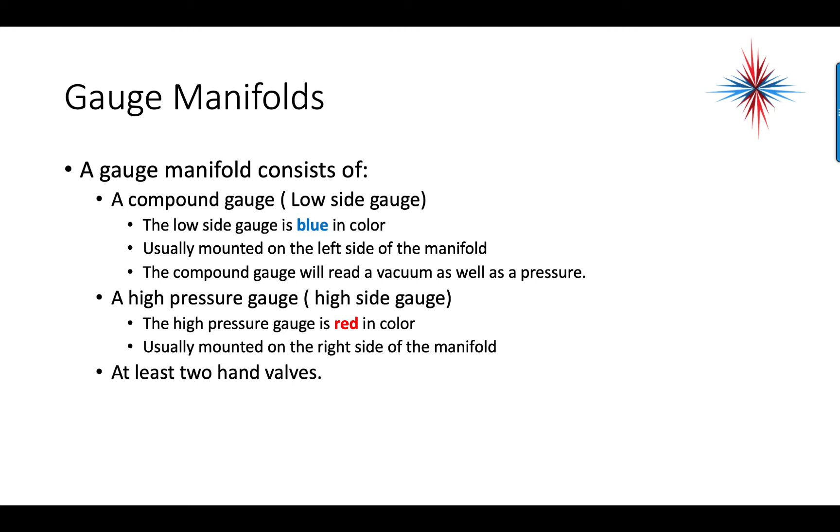And there's at least two hand valves, usually on the left and right side, or on the left and right front side of the manifold.

A gauge manifold allows a service technician to check the operating pressures of both the low side and the high side at the same time. The operating pressures of the system are read in pounds per square inch.

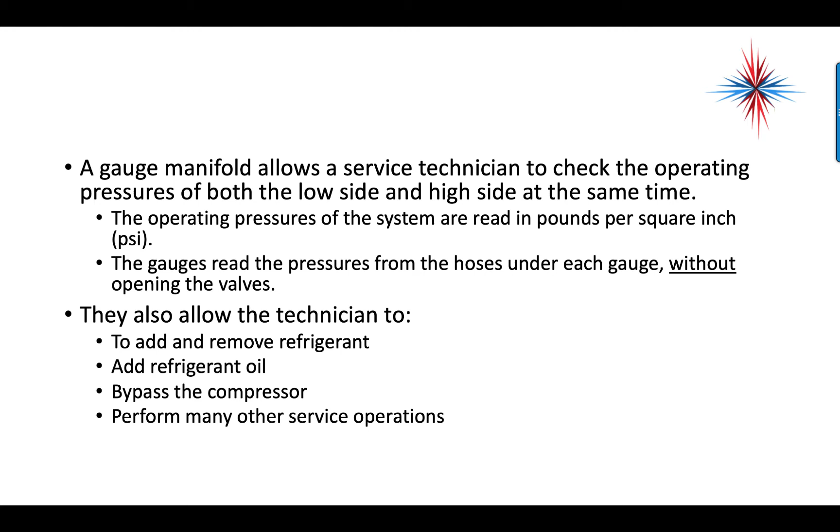The gauges read the pressure from the hose under each gauge without opening the valve. In other words, make sure your valves are closed before you connect the gauges. The gauges will also allow the technician to add and remove refrigerant, add refrigerant oil, bypass the compressor, and perform many other service operations.

So this is a picture of a gauge manifold. You have your two gauges. Low is the blue, high is the red. You have your high pressure gauge, compound gauge, low side valve, high side valve.

Again, the valves are closed to give the path to the gauge by itself. You have the connections, you have a sight glass sometimes, and then you have additional ports on the left and right side.

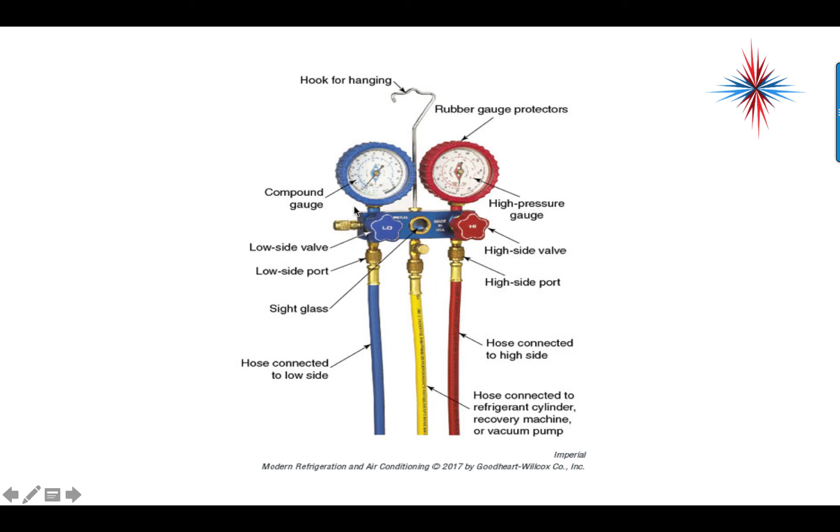Low side pressure gauge reads the pressure through the whole low side of the system, from the metering device to the compressor. High pressure gauges read the pressures on the high side of the system, from the compressor to the metering device.

Under normal circumstances, you will see the same pressures all the way through the low and the high side of the system. In other words, it doesn't really matter where on the high side you're connected, doesn't really matter where on the low side you're connected. You might see a PSI difference if you have a large evaporator coil, long line set, or a very large condenser.

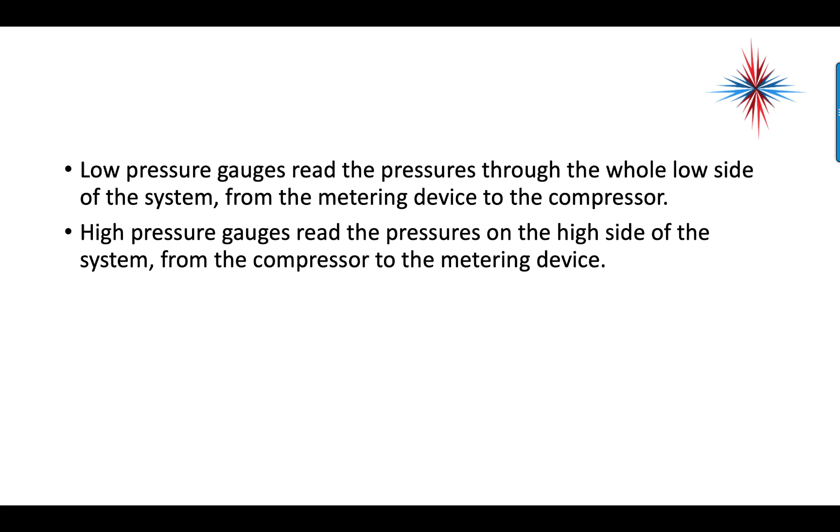But it's not enough to make a difference under normal circumstances. You can always say there's an oddball situation, but 99% of the time you should see relatively close to the same pressures.

Manufacturers color code the low and high side of the gauges. Blue hose to the low side of the system, red hose to the high side of the system.

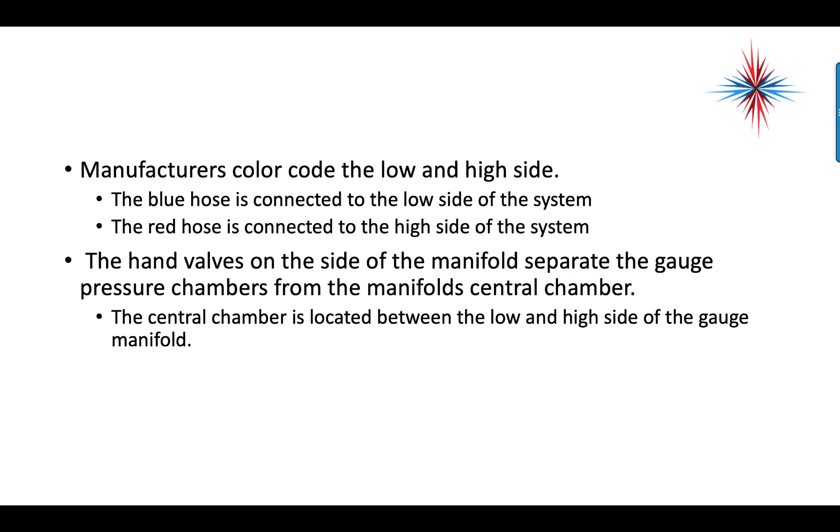The hand valves on the side of the manifold separate the gauge pressure chamber from the manifold center chamber. The center chamber is located between the low and the high side of the gauge manifold.

A yellow hose connected to the center port is connected to a refrigerant cylinder, a vacuum pump, or a recovery machine. Some gauge manifolds have a sight glass that can be used to view the flow of liquid through the center chamber. It can also be used for charging or recovering liquid refrigerant.

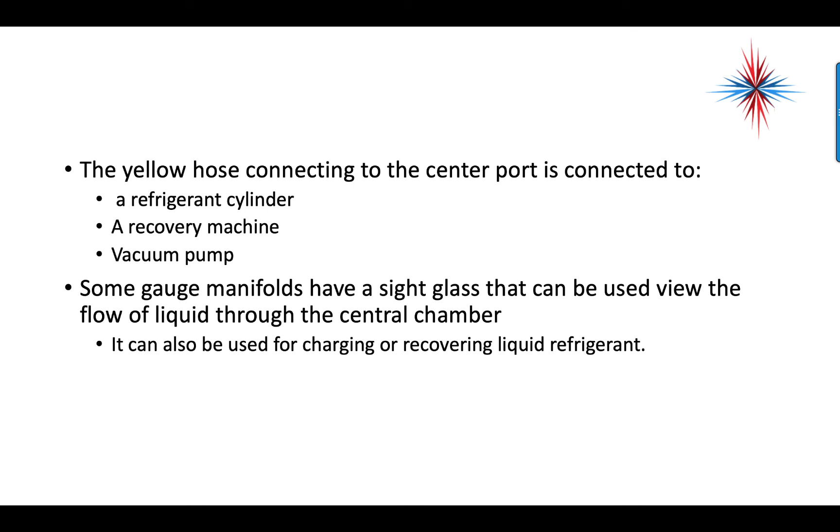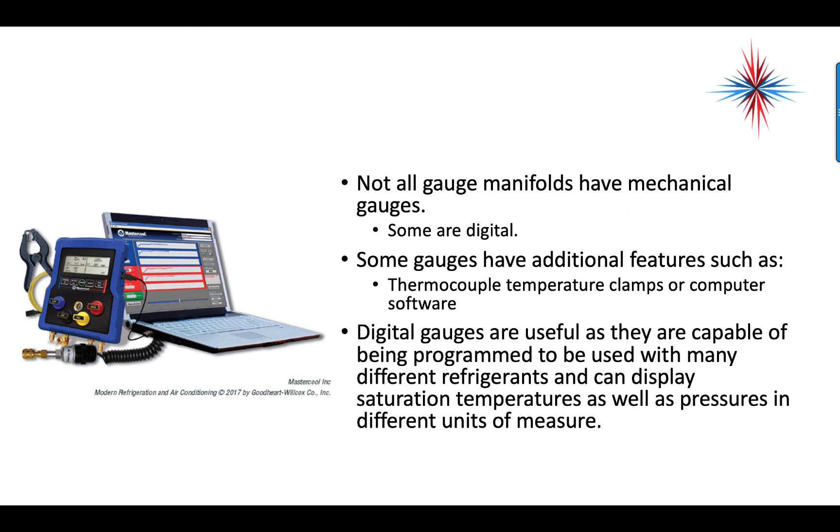Not all gauge manifolds have mechanical gauges. Some are digital. Some gauges have additional features such as thermocouple temperature clamps or computer software. Digital gauges are useful because they're capable of being programmed to use with many different refrigerants and can display saturation temperatures as well as pressures in different units of measurement.

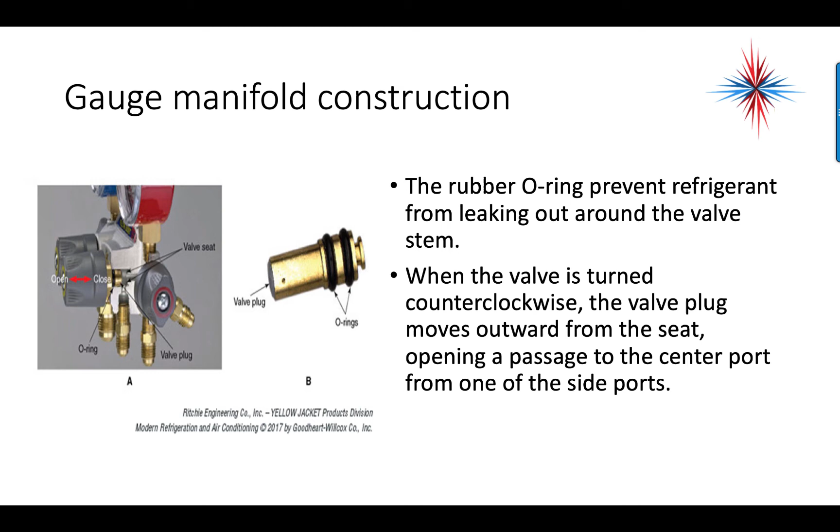The rubber O-ring prevents refrigerant from leaking out around the valve stem. When the valve is turned counterclockwise, the valve plug moves outward from the seat, opening a passage to the center port from one of the side ports.

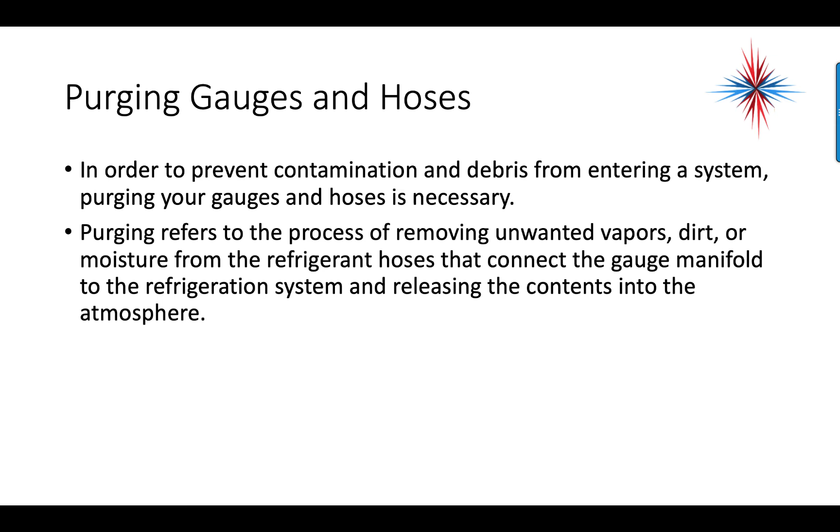In order to prevent contamination and debris from entering a system, purging your gauges and hoses is necessary. Purging refers to the process of removing unwanted vapors, dirt, or moisture from the refrigerant hoses that connect the gauge manifold to the refrigeration system, releasing the contents into the atmosphere.

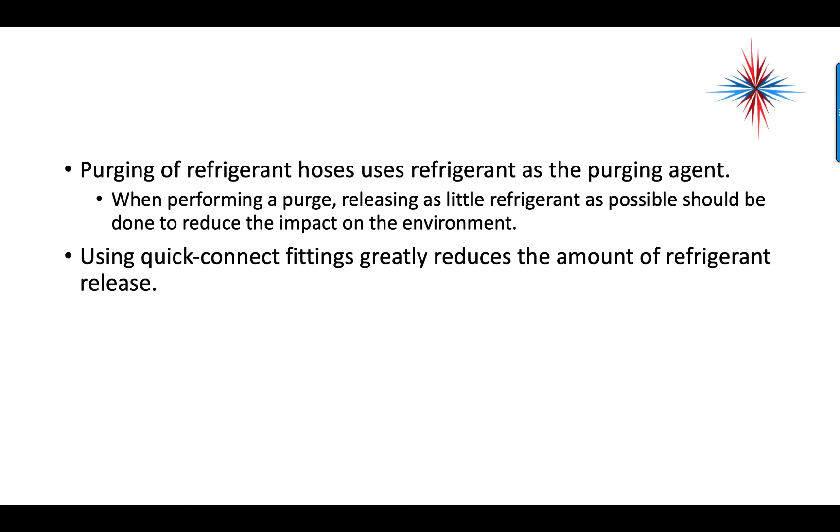Purging of refrigerant hoses uses refrigerant as the purging agent. When purging, release as little refrigerant as possible to reduce the impact on the environment. Using quick connect fittings greatly reduces the amount of refrigerant released.

Quick connect fittings are spring-loaded brass fittings which seal off the refrigerant inside each hose. Older gauge sets can be retrofitted with quick connect fittings. You can actually buy these, even on Amazon if you have to.

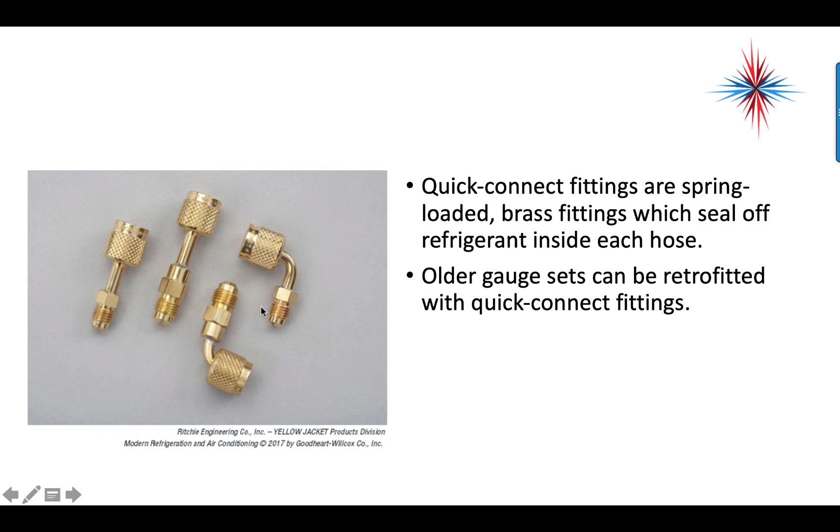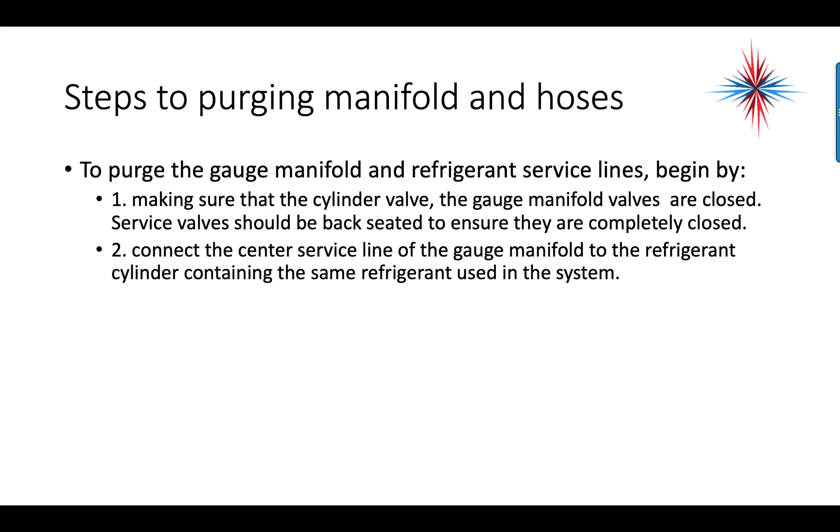To purge the gauge manifold and refrigerant service lines, begin by making sure that the cylinder valve and gauge manifold valves are closed. Service valves should be back-seated to ensure they're completely closed. Connect the center line of the gauge manifold to the refrigerant cylinder containing the same refrigerant as used in the system. Remove the caps from the system service ports and loosely connect the gauge manifold's low and high side lines for purging.

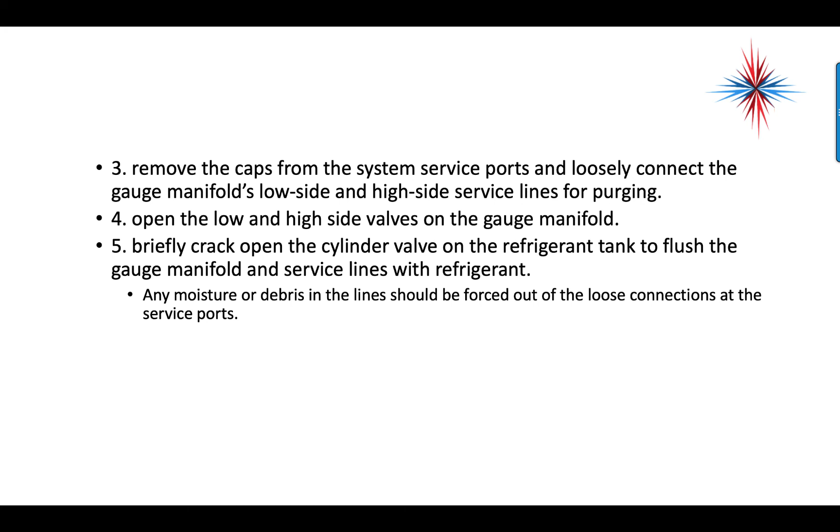Open the low and high side valves on the gauge manifold. Briefly crack open the cylinder valve on the refrigerant tank to flush the gauge manifold and service lines with refrigerant. Any moisture or debris in the line should be forced out of the loose connection at the service port. Close the cylinder valve, tighten the service line fittings at the ports. The service valves can now be opened without fear of contaminating the system.

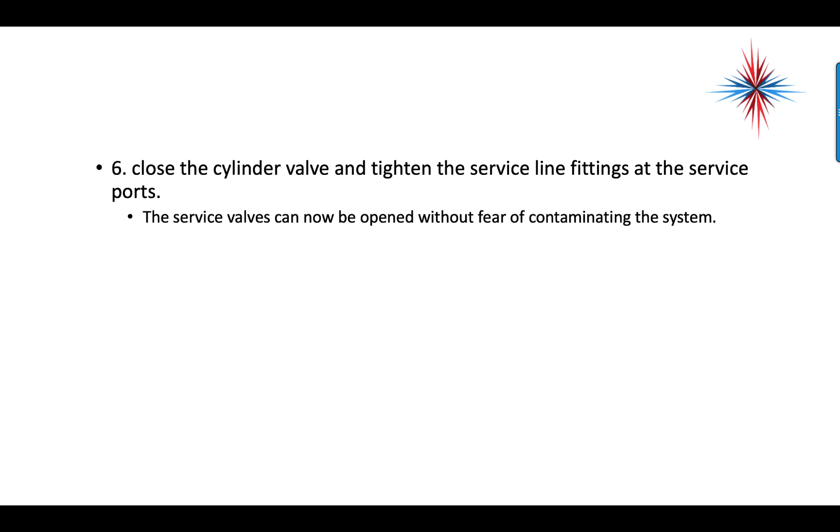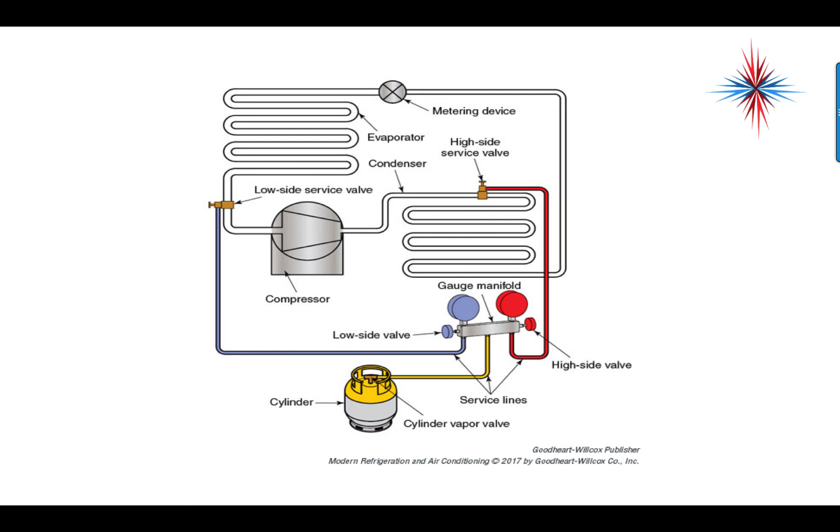This is how they connect. You have the red hose on the high side, blue hose on the low side. The low side valve and high side valve should be closed unless you are using the yellow line. Don't open those if you're not using the yellow line connected to a cylinder or some other device.

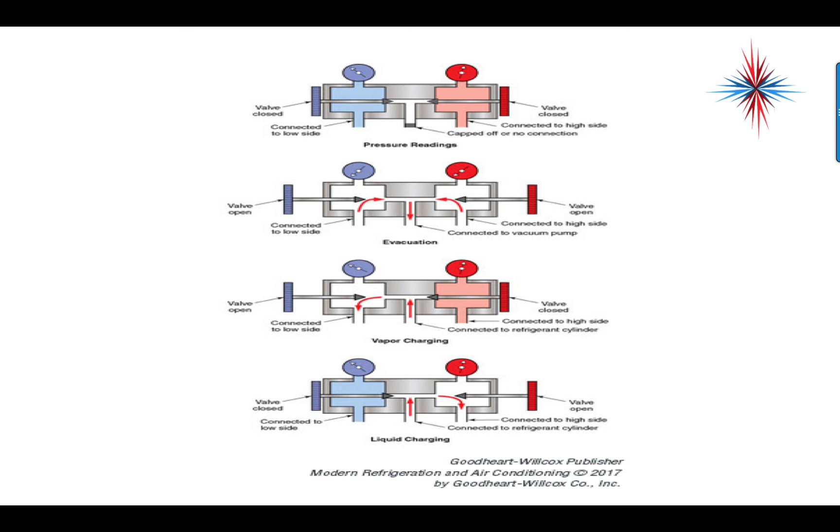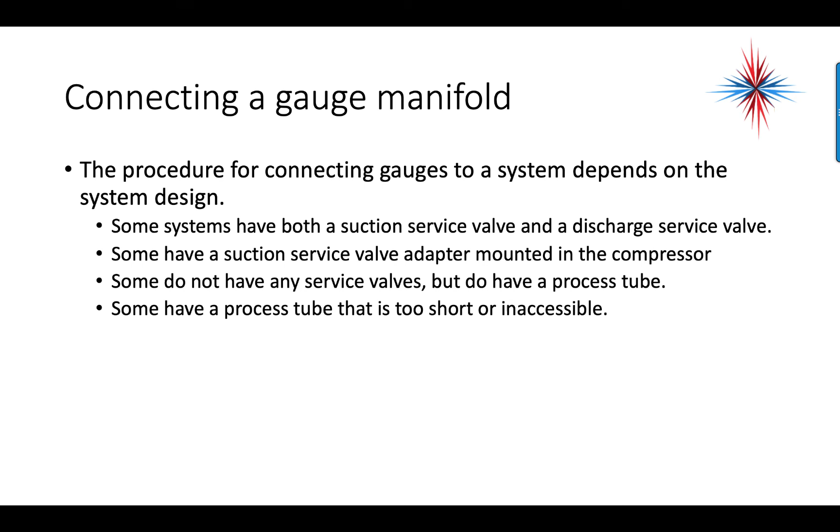The procedure for connecting gauges to a system depends on the system design. Some systems have both a suction service valve and a discharge service valve. Some have a suction service valve adapter mounted in the compressor. Some do not have any service valves but have a process tube. Some have a process tube that is too short or inaccessible.

These are just some of the different areas that you can use to connect to refrigerant lines. You have the valves up here in A. You have a valve adapter up on B. You have a process tube over on C. And then you have a piercing valve over on D.

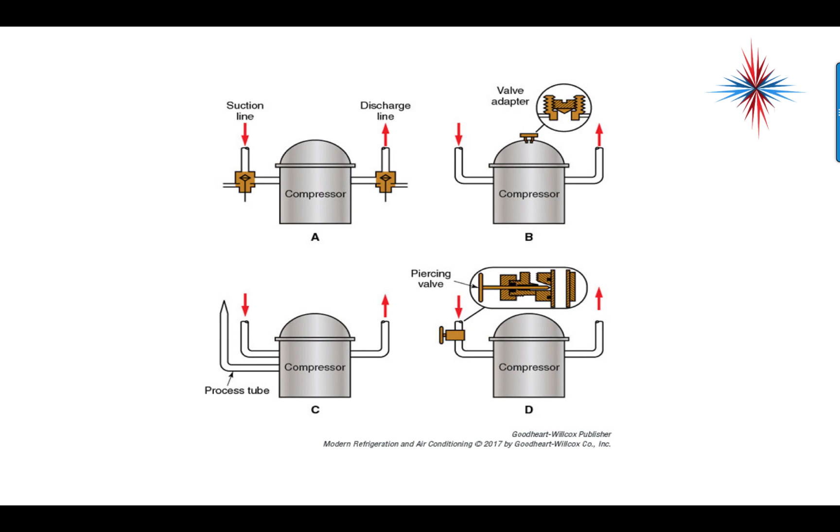Once you add a piercing valve, you have to recover the refrigerant and put in a true Schrader core, because you cannot leave a piercing valve. They leak.

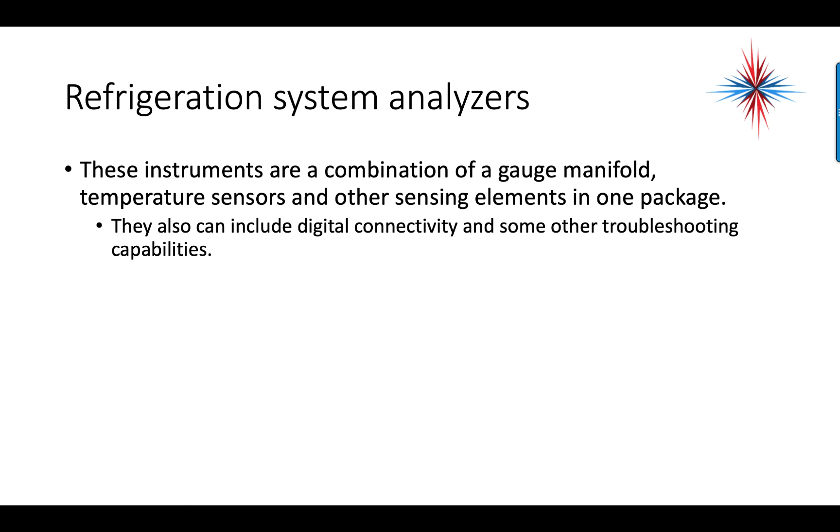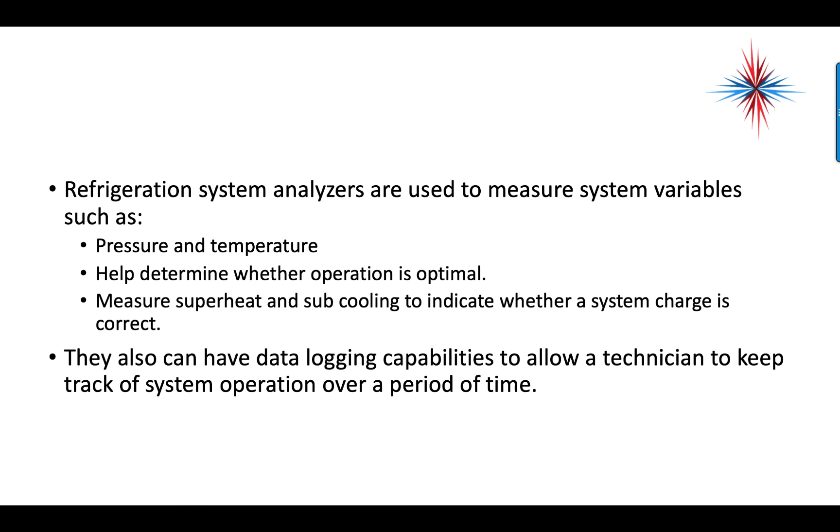The refrigeration system analyzers combine the gauge manifold and temperature sensors into one package. They can also include digital connectivity and some other troubleshooting capabilities. Refrigeration system analyzers are used to measure system variables such as pressure and temperature, help determine whether operation is optimal, or measure superheat and subcooling to indicate whether a system charge is correct. They also have data logging capabilities to allow technicians to keep track of system operation over a period of time.

More and more techs are carrying these. I carry the Testo smart probes, same basic principle. My phone is what I actually use to read the pressures and temperatures on.